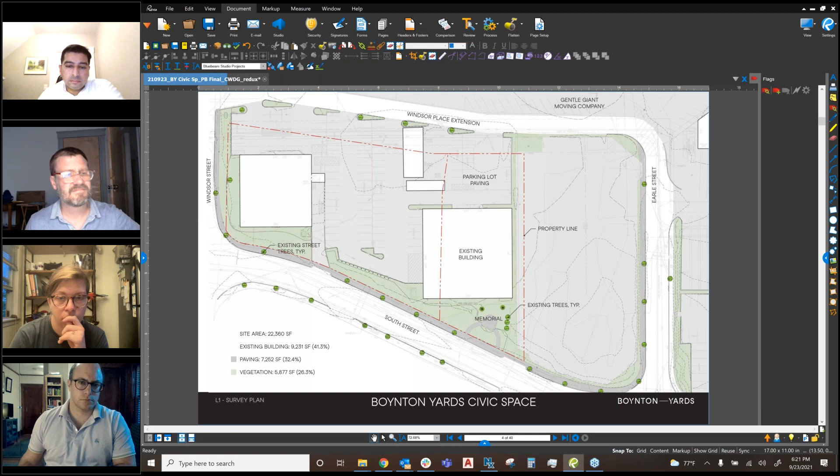We're focused on creating a civic destination with music, food, art, accessible to everyone, with vibrant shared seats, streets, and various public amenities and activations.

We invested in Somerville because of its distinctive, independent culture and visionary urban development plan. And the approved plan will eventually produce 2,000 new jobs, over an acre of civic space, over 12,000 square feet of POPs, $10 million in annual taxes, $23 million in community benefits, and $55 million in infrastructure.

This is truly a public-private partnership, and I think we're hoping to continue with this vision through the second application, the site plan review and approval of the civic space before us and the new building. So with that, I'd like to hand this over to Rolla Indris, the project manager, and have her introduce our consultants.

Thank you, John. Thank you all for being here tonight. It was not long ago that we were in front of you talking about our master plan special permit, and we've gone a long way since then, collaborating with the community and the city to get here tonight. We're super excited to present both projects. I think we've received great feedback along the way and incorporated many of the neighborhood's comments as well. And just to the earlier point on whether it's one presentation or two, we actually have 2 separate presentations. So we'll see civic space first, and then we'll go to building 2.

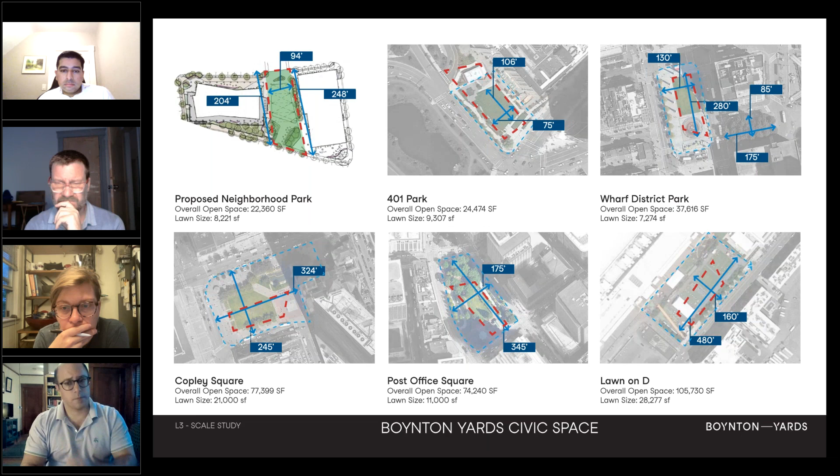So things like dog park and fitness and informal play, seeing a need for having more plaza and flexible spaces for seasonal uses and different community events. The idea of having performance space, a flexible lawn, not a lot of water play in the neighborhood, and maybe some idea of water features.

We also, in talking with PSUF, understood that it's an area that really lacks a lot of vegetation, and whatever we could do to green it up and add more shade for the comfort of the park users was a really good thing to get into the planning of the space. And then lastly, I think as Louisa touched on, the idea of creating an 18-hour activated space that really is intended to serve as a community space as opposed to something that serves the adjacent tenants.

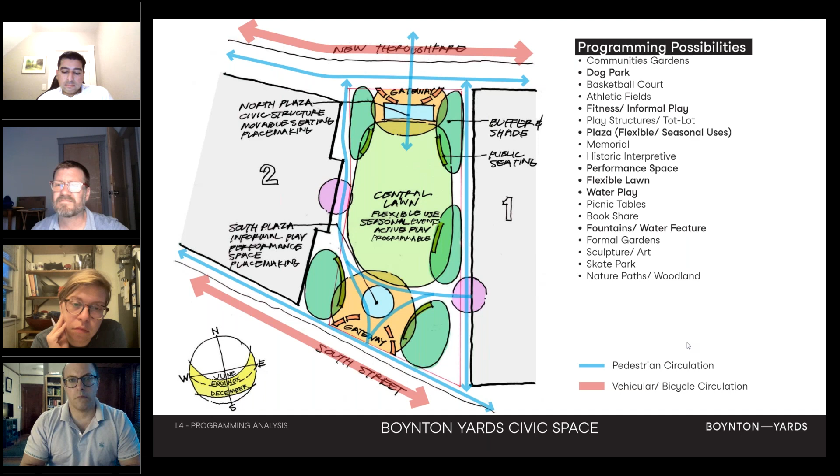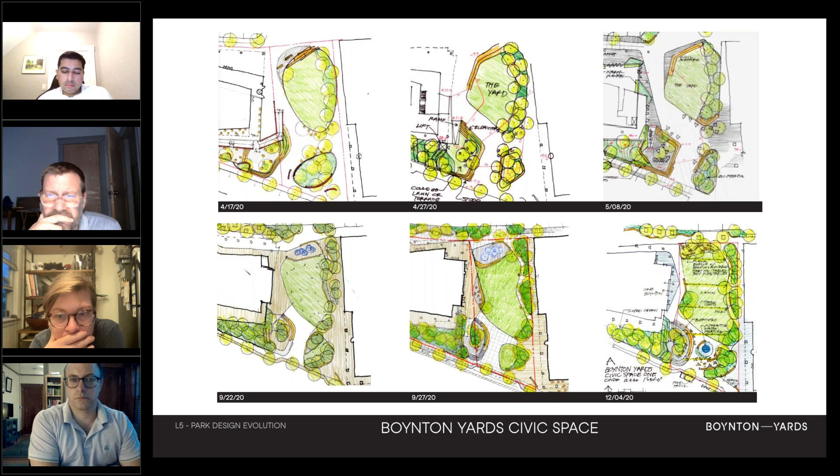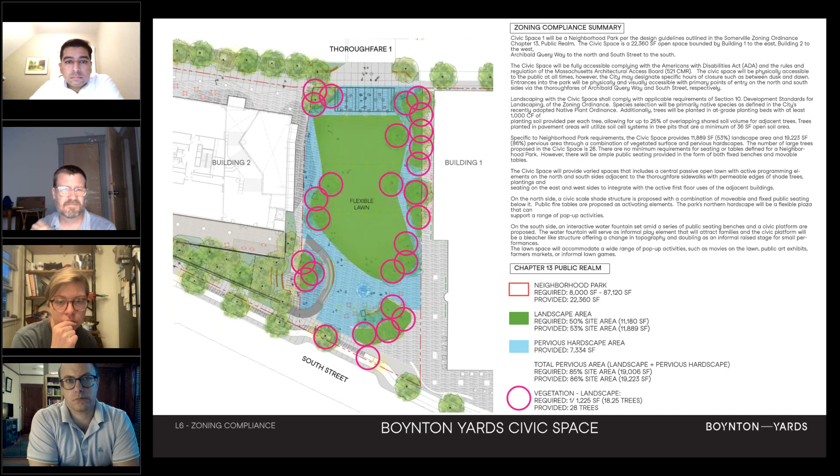Now into the actual plan and the form it took through our process. On the northern side, adjacent to Thoroughfare 1, which will be a flush shared street feeling more pedestrian than vehicular, is what we've called the flexible plaza. That's a hardscape area that will spill into the thoroughfare, so if that street were shut down for festivals, the activity happening there would spill into the open space.

Adjacent to that, at the top of the site, is a civic-scaled shade structure, a large arbor element providing shade. Below it would be public activators like fire pits, movable seating, and fixed seating, giving a wide range of options for users and spaces where people can socialize at the top of the space.

At the bottom, adjacent to South Street, is an interactive water feature, a flush water feature with color-changing lights creating different effects, a dynamic and fun element that attracts families. Surrounding that would be a series of fixed bench seating and plantings, making it a green, vegetated space.

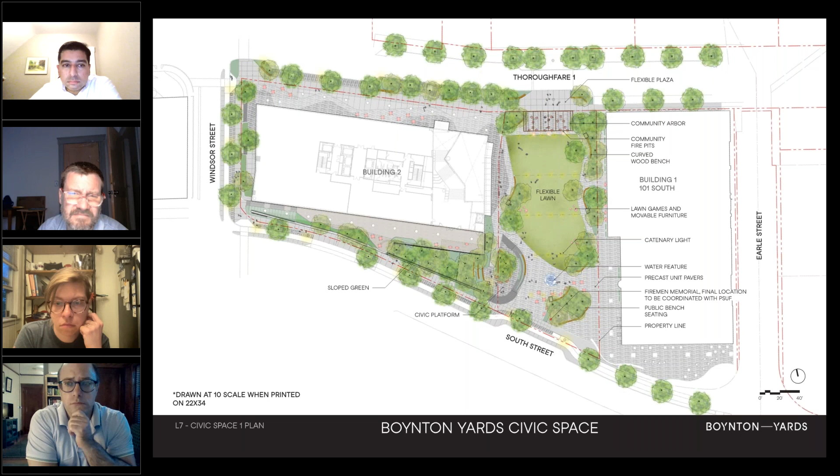In terms of the topography of the site, it's completely barrier-free and ADA accessible. It's a very flat site. The elevation is primarily all at elevation 10. The only grade change we really have is the one we're creating with the civic platform. On the lower left-hand side of the civic space, you can see that we're getting up about 2.5 feet to elevation 12.5. There's an accessible ramp that provides ADA access. And then that grade change is stepped down into a series of bleacher elements that allow people to sit at different levels and interact with the open space.

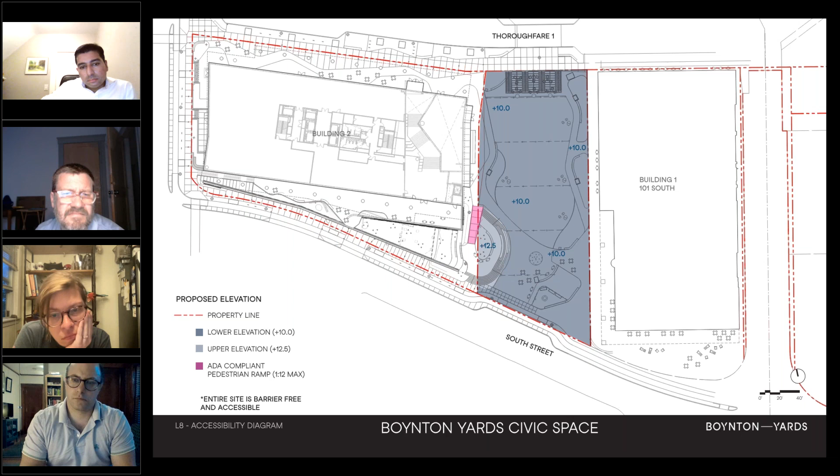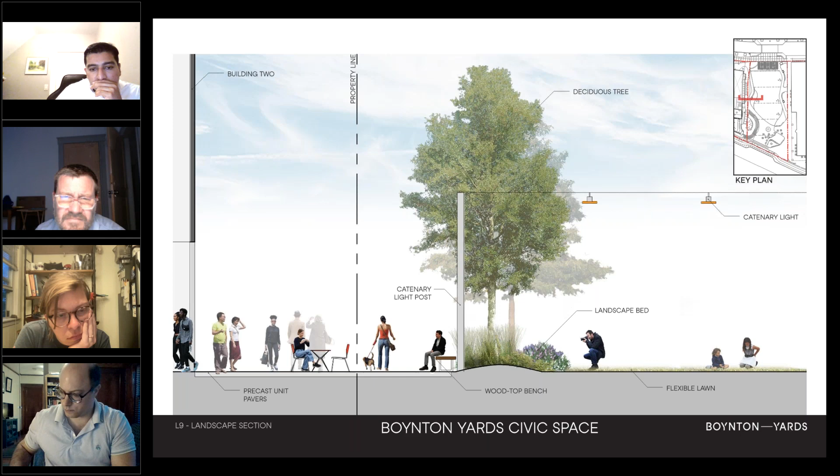The next series really gets into the edge conditions around the open space. This section cut is taken on the eastern face of Building 2. We have a widened hardscape that interacts with the first floor use of the building. You can see our property line and then a little more hardscape. And then there's a gentle roll to the topography with vegetation, which is the transition into that more pastoral green space.

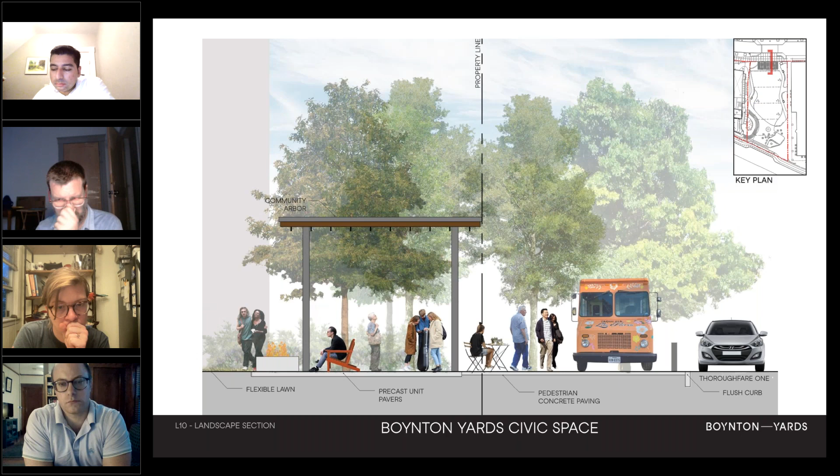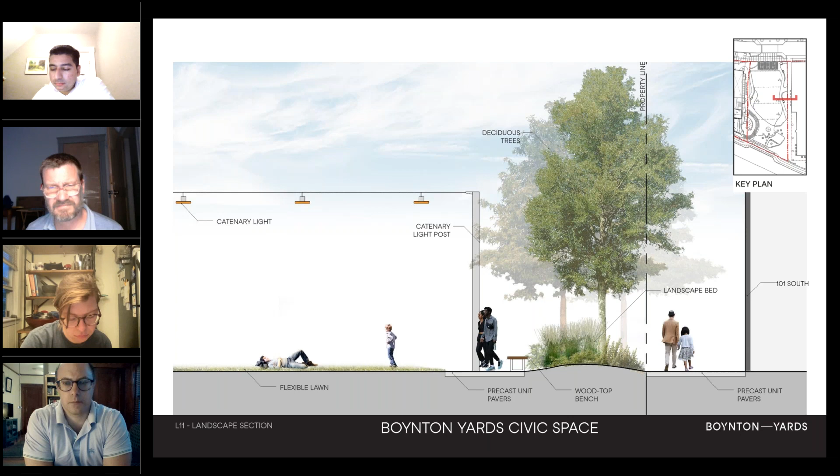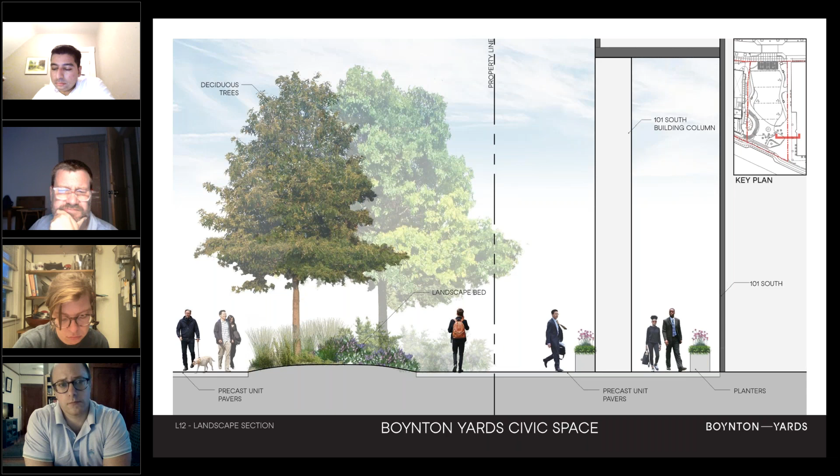As we move further south along the 101 South building, there's the lobby, which is basically an arcade. The face of the building at the first level is pulled back, so that hardscape is recessed. That's where we have some of our adjacent hardscape that serves not only the 101 South building, but starts to bleed into what would be the southern entry, the gateway into the civic space. With a bit of topography and the indication of trees, we're trying to not only provide shade but also buffer the building so that the park feels of a comfortable scale.

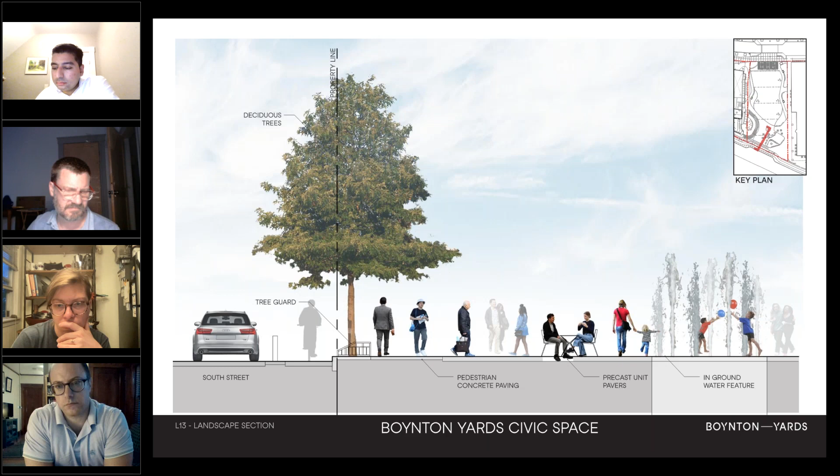That platform also has the ability to serve as a small performance stage because it's elevated. It's a space where you can imagine small events taking place. To the backside of that, we start to introduce more steps and more vegetation, which climbs up over the bike room of building 2. It's an intensive green roof, and that landscape rolls right up into the second floor elevation of the terrace. So it's a publicly accessible open space that really ties the building and the landscape together.

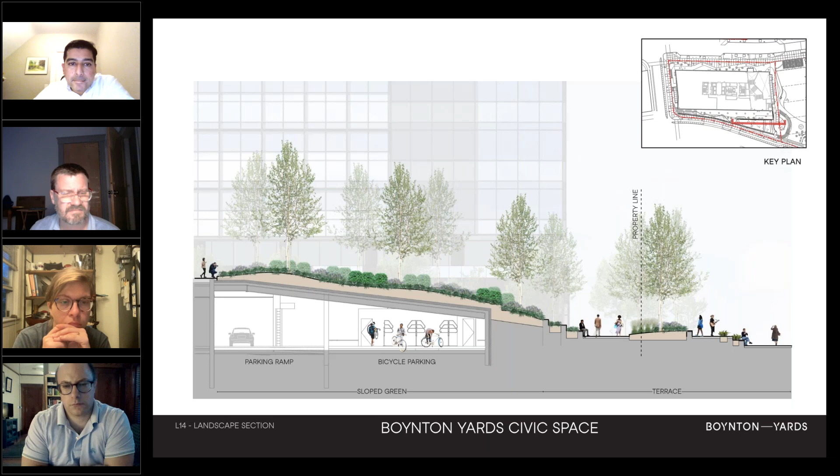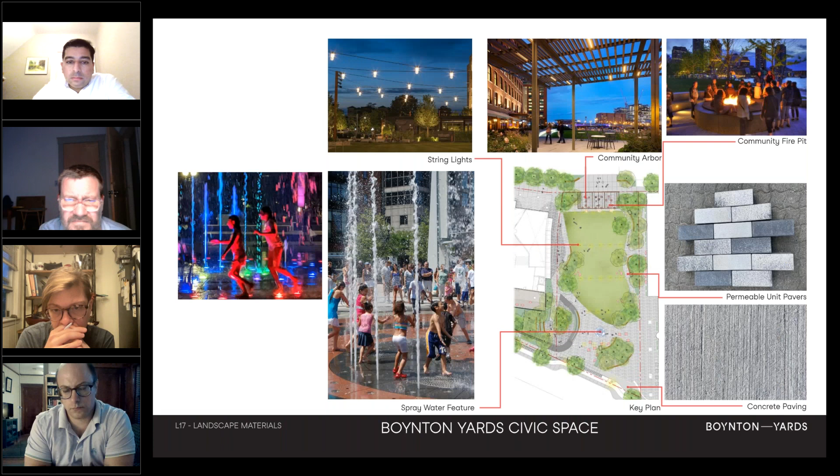In terms of the materials, this gives some character sketches of what the water feature could look like in terms of the color changing and the types of water displays, the image of the suspended lights above the open space, and then the hardscapes on the right-hand side, a combination of permeable pavers and concrete for accessibility, and then in the upper right, the idea of this community fire pit.

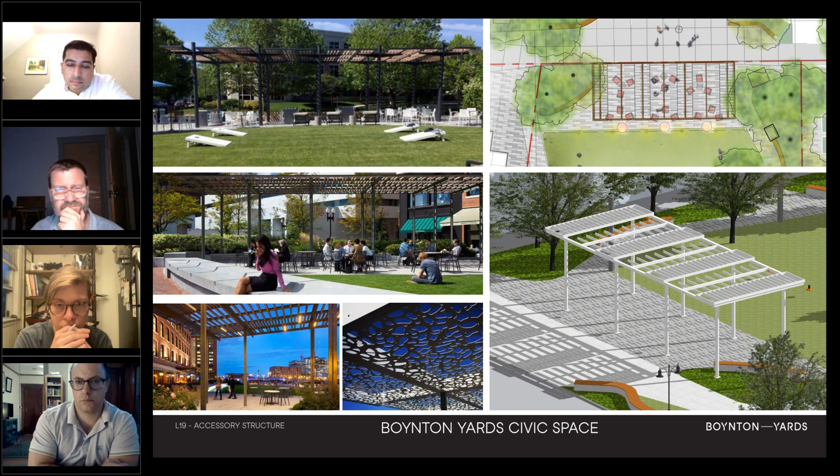Next slide. And then the site furnishings, again, really want to have a combination of fixed and movable seating of different sizes, characters, colors. So it's a really vibrant and dynamic public space where people can move the seating around as they see fit to dial in their own preference. And then the idea of the shade structure.

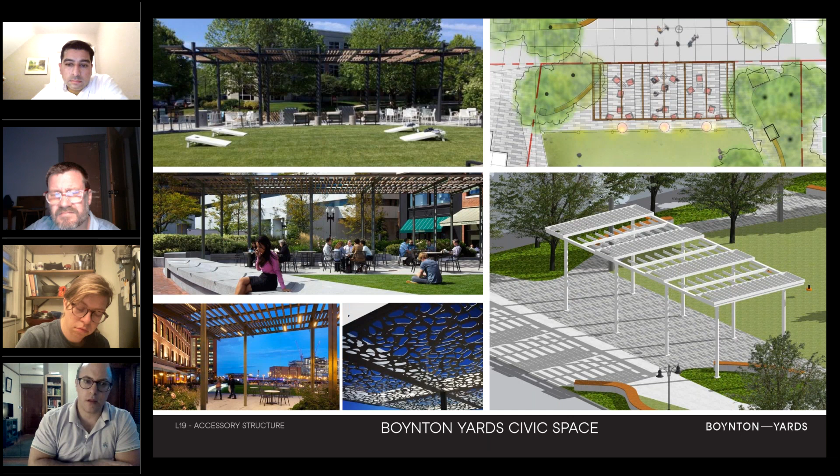So these are some precedent images of projects that we've worked on before. On the right-hand side, you can see the plan view and then a 3D model that we've developed to study how the lath work on the top or the roof of it can be designed so that it casts very interesting patterns throughout the day on the hardscape and provides different degrees of shade depending on the angle of the sun. Next slide.

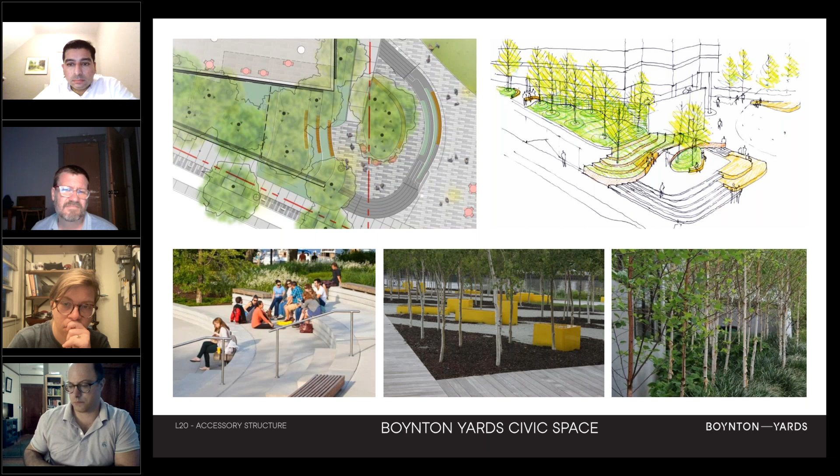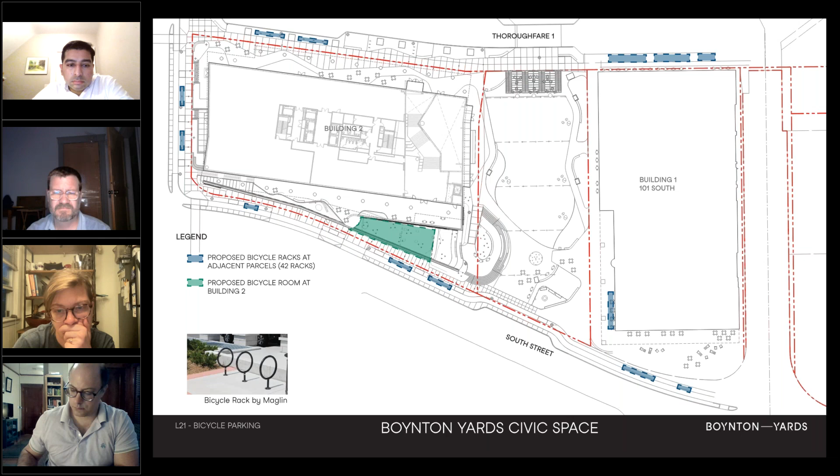Bike parking. So going through the process, we're really trying to maximize the amount of open space in the park, and both of the adjacent buildings, which are very integrated in terms of access, have a lot of requirements for bike parking. So the current proposal is that all of that short-term or bike rack parking that's out at the sidewalk is actually on the adjacent parcels, but there's a lot of it. The other thing to note is that on the Building 2 parcel, we have a large bike room that Victor will talk about that's located below the slope green. So there's a lot of activation and a lot of facility there for bikes immediately adjacent to the civic space.

And then, of course, the fun stuff - the vegetation. The existing condition didn't have a lot of that. It was not biodiverse. There wasn't a lot of it. So we've been working with the native plant ordinance that the city has put out. We've been talking with PSUF about different species, and we've been talking to other consultants internally about how to get species that are of maximum wildlife value so that it's a healthy ecosystem. So the idea here is that we have all native plants, plants that are able to support a lot of habitat, a lot of pollinators, but also be colorful and beautiful compositions unto themselves, so that it's a very pleasing thing to be in terms of that open space.

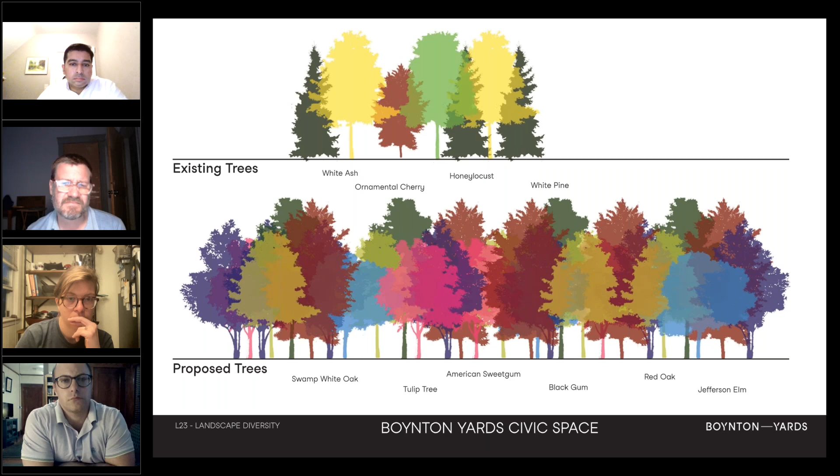Just to underscore the benefits of the landscape design, obviously we're trying to have native plants, but we're going beyond that and really trying to have species that are supportive of local bees and insects, supporting habitat and pollinators, so we can start to bring back some of those ecological services to the neighborhood.

The last thing to touch on is this idea of the temporary park. All this stuff is great and will be built in the future, but we really want to get into the ground now. As part of the 101 South project, the interim park has been constructed—basically a lawn space with some seating—and it's something we're using as a testing ground, so we can survey users and get more information about what people would like to see in the final design of the park space, in terms of programming and activation and other features.

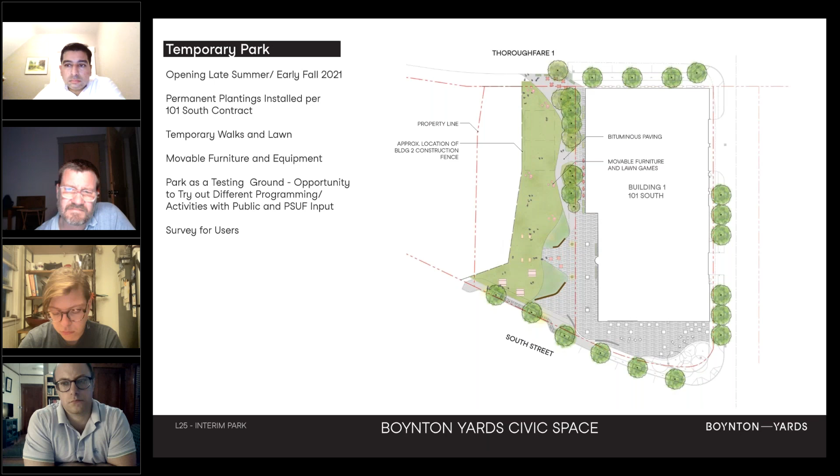The developers are doing a lot of activation lately, through the whole course of summer pretty much. The Once Somerville Music Festival has been having venues out on the site or adjacent to it, which has been really successful in starting to get people excited about coming to the site. There's a ton more of upcoming events.

I mentioned the idea of a survey—for a lot of our public park projects, we employ a SurveyMonkey app, an app-based questionnaire where you can survey what people using the space would like to see. Then you get all that data, sort through it, and really come to a good idea of what a consensus-based approach might be to some of the uses for the open space.

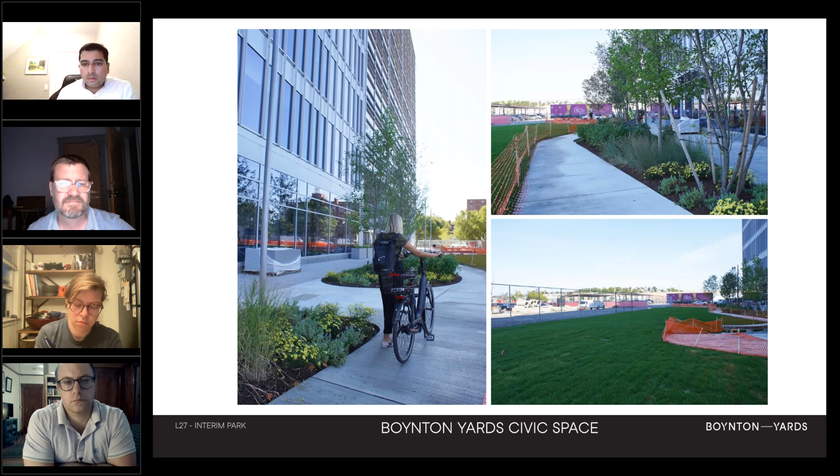Here's just a couple shots of what the current condition is. On the eastern side of the civic space, the 101 South building has actually begun to install a lot of the permanent vegetation that will be part of the finished park design. That'll already be in place and start to reach a mature condition by the time the rest of the park is built out.

The lawn is in place. It's still being established and watered in, but that'll be able to support various types of activities very soon.

I believe that's our last slide. Thank you.

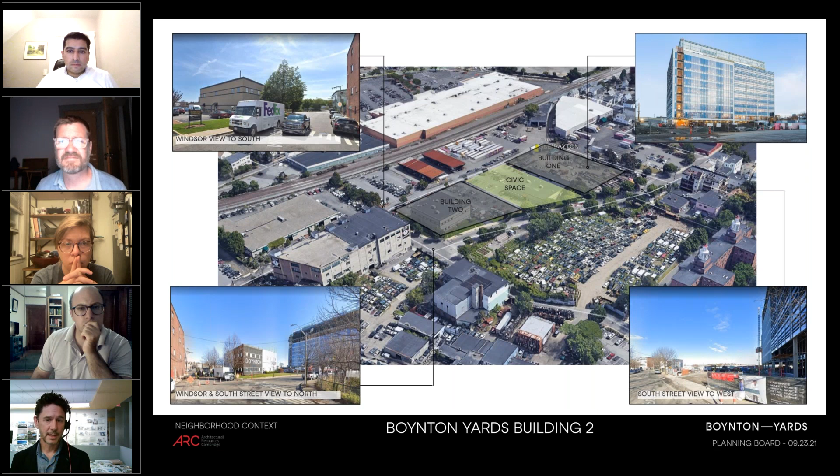So as we began, our process is predicated on finding the best possible solution. That involved a lot of sketching, thinking about ways in which to connect people from all four corners of the site, and how can we begin to draw people to the site.

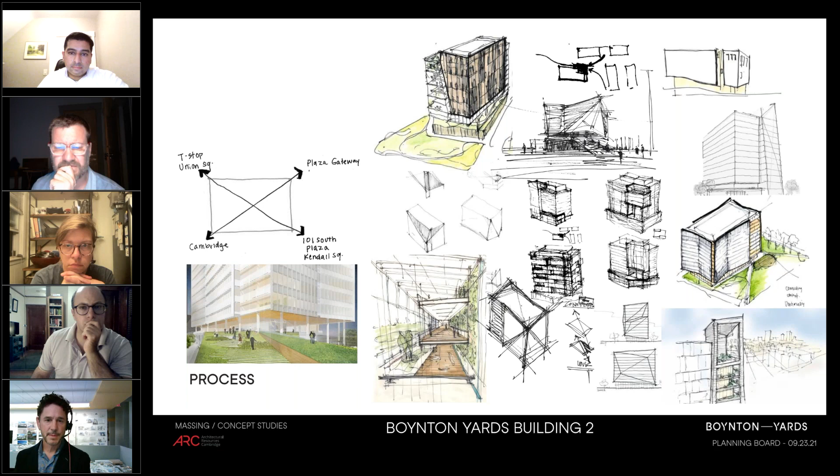Ideas of greening the building, landscape, ecology and sustainability were primary in everything that we did, and fundamentally, as a means of establishing connections to the landscape and making the place feel very much like the public realm that people wanted to be in - this is a home for people.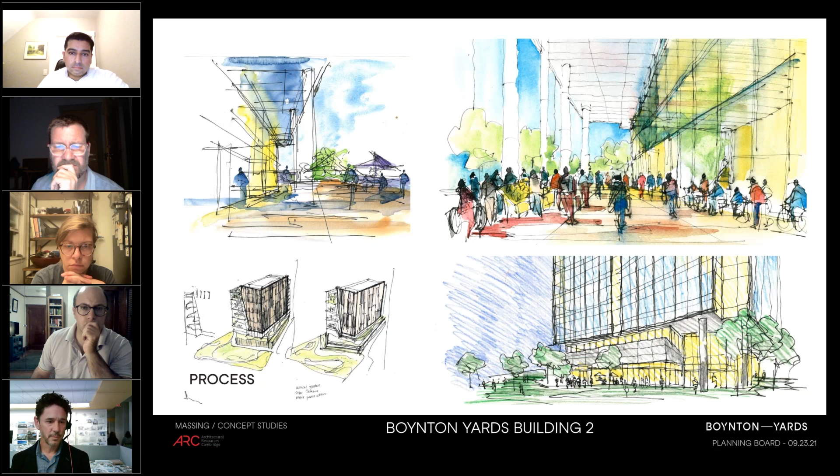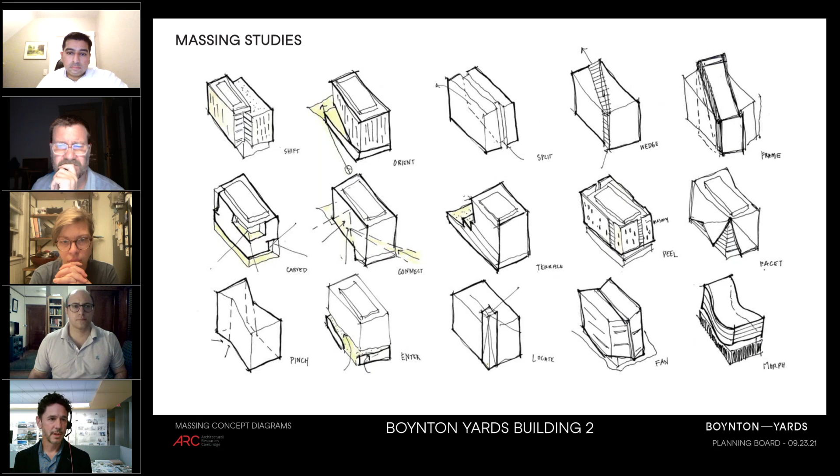In terms of the massing, we began looking at a variety of massing options, thinking about how we organize the building around the site, how do we draw people through the building, and how people begin to kind of perambulate around the building as priorities.

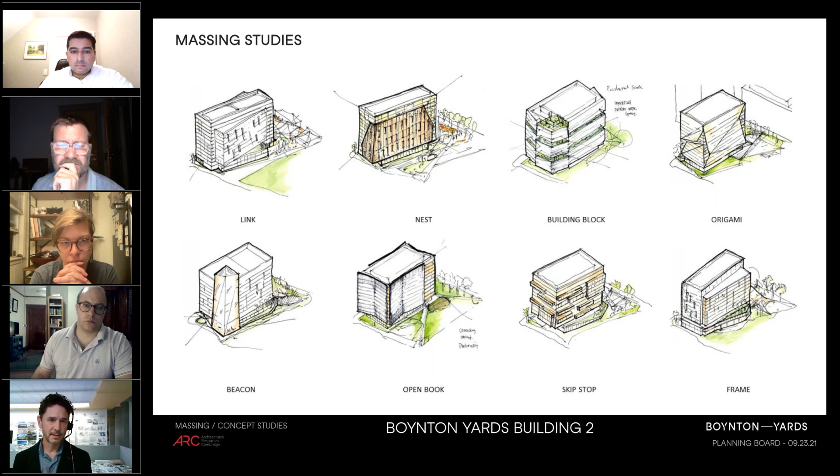As we move forward, we began to distill some of these massing studies into clear ideas that are linked in notions of art and science and placemaking. And that idea of placemaking is fundamental in everything that we were thinking about.

As we move forward, the larger ideas began to distill into three clear ideas that we defined as: link, which is about making connections; this idea of origami, thinking about folded paper and marrying science and art; and the third option became a hybrid of the two, thinking about this idea of an open book, ideas of text and reading, and connections to public space and how people spend their time there.

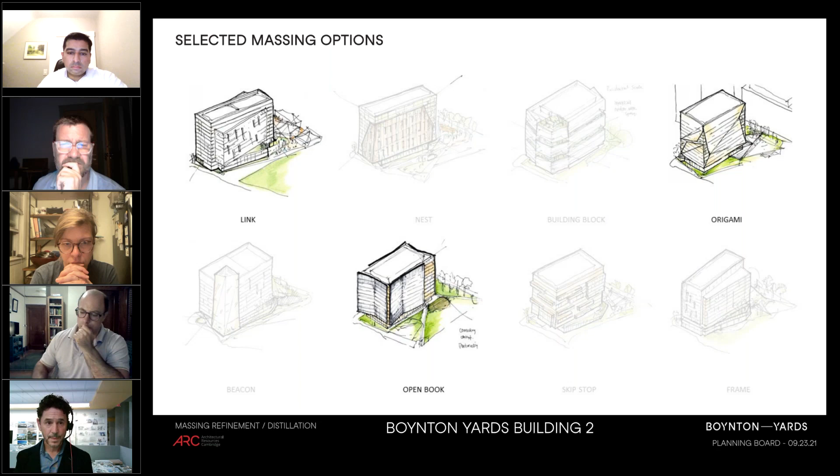As a part of the Somerville zoning ordinance, we were required to bring three different and distinct options to the UDC for review. So we developed each one individually.

The link, kind of traversing diagonally from northwest to southeast. Origami, thinking about this folded surface - and with the origami was where this first idea of the landscape beginning to kind of fold up into the building became an idea. And then with open book, the articulation of the building and the idea of landscape being integrated with the building became an even more powerful notion that we began to develop.

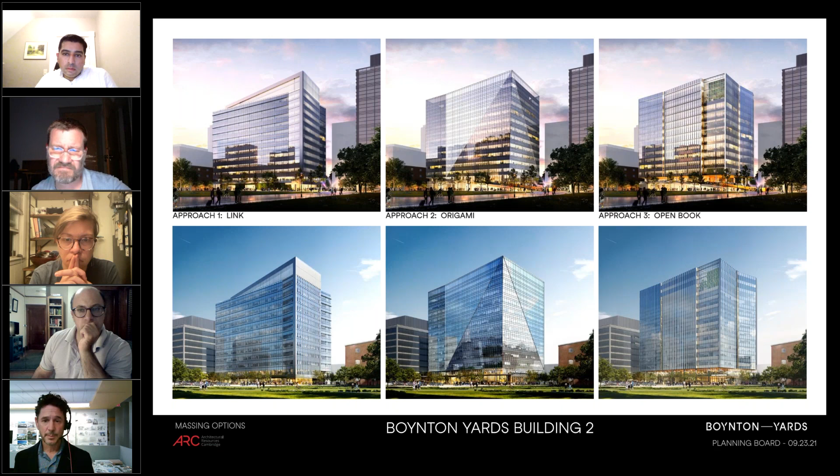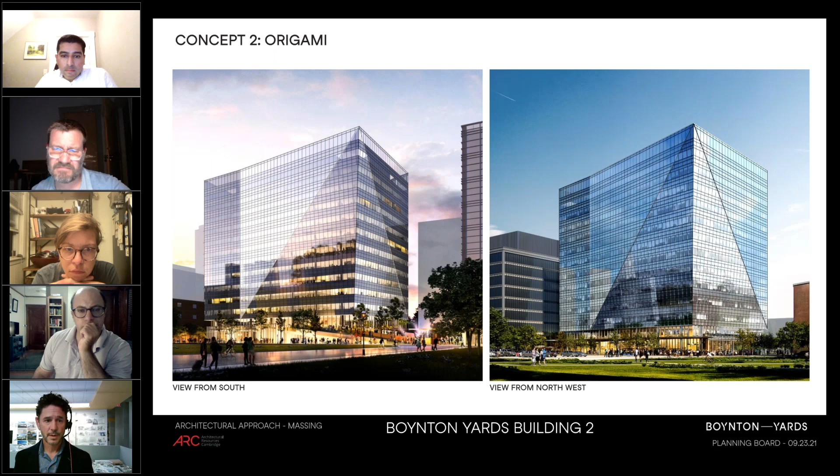And quickly, these are the larger views of the initial concepts: link, the origami study, and the open book - which, subsequent to reviewing with the Urban Design Commission, they agreed that our preferred scheme of the open book was the way to proceed.

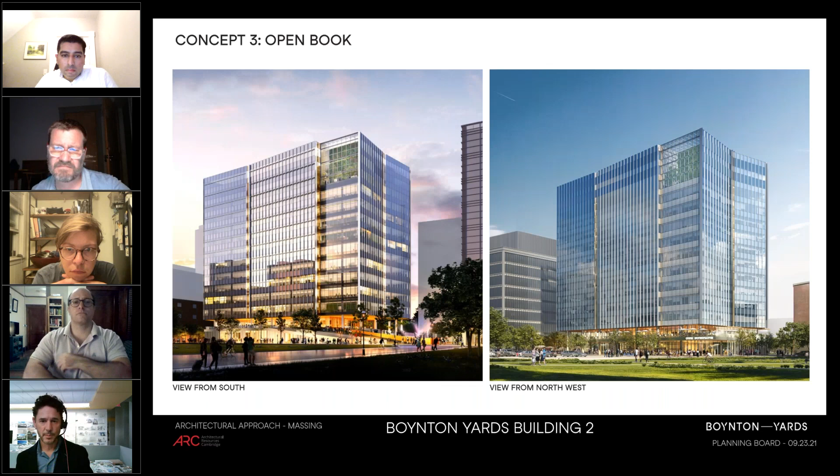The open book also offered us a little bit more flexibility in terms of massing development, thinking about the Somerville zoning guidelines for the requirement of a two-story podium and a clear division of a base, a middle, and a top. It also allowed us to refine the massing and scale, carve away the corners, and make a building that was more human scaled with different readings depending on where you looked at it from different areas in the site.

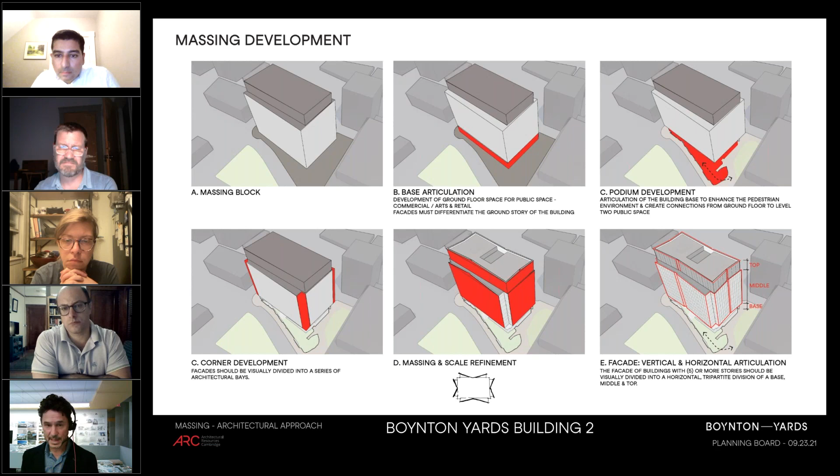Very quickly, these are the massing diagrams submitted to planning and zoning. Zoning compliance diagrams, which I don't need to spend time on, but they articulate the two-story podium and the tripartite organization of the building and conformance to the Somerville zoning guidelines.

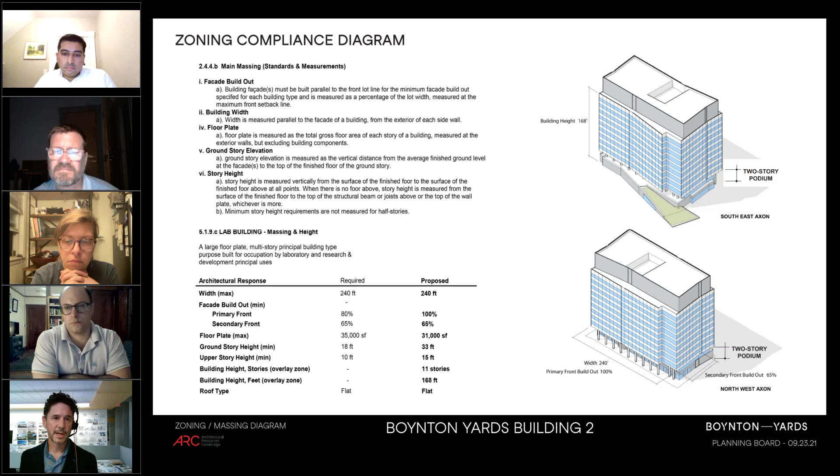This image further articulates conformance to Somerville zoning guidelines, both in terms of the development of the facade, the piers or pilasters, the visual light transmittance of the glass and the visual connections through it, and then a clearly differentiated lobby and storefront facade system to create human scale development around the building.

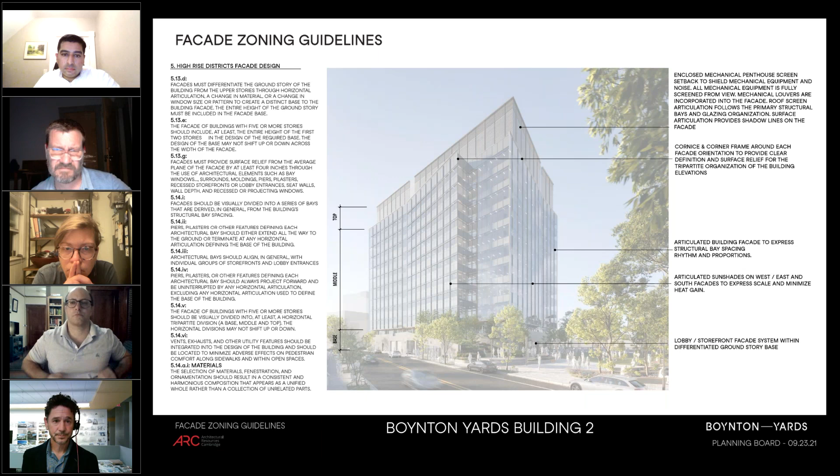Conceptually, this idea of placemaking was very important to the development of the plan. We're working at a range of scales and textures, really thinking about how we begin to attract people to the building and through the site.

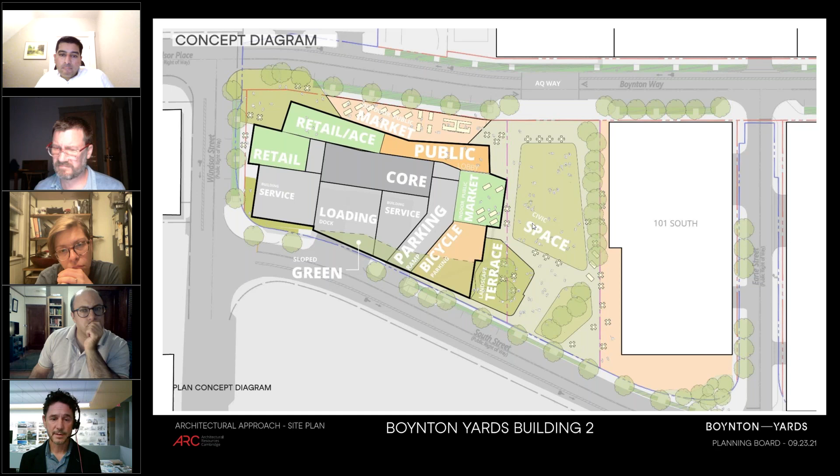As Ian noted, Thoroughfare 1 and the connection to the north side of our building has the potential to become a very expansive and generous public space. To that end, the north side of our building at the main entry is envisioned as potentially an outdoor public market, connecting from the west side of our building to the civic space—a powerful idea, in addition to the bicycle parking underneath the sloped green roof that Ian showed you previously.

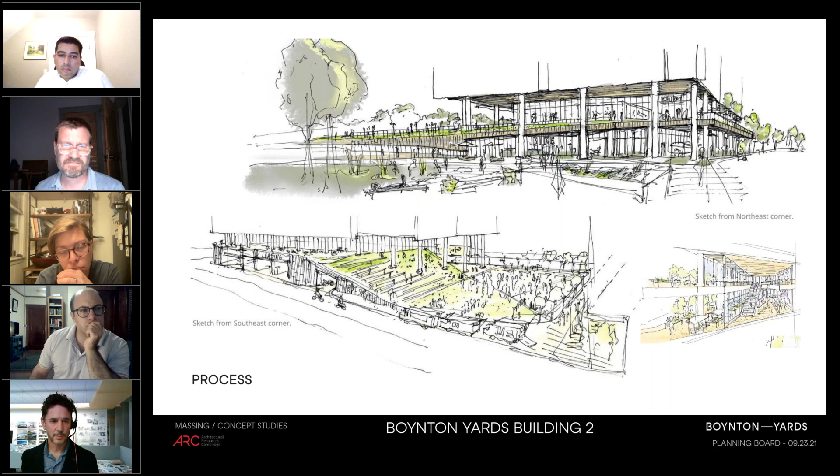Here's a little bit more of the process, really thinking earnestly about how you begin to fold the landscape up and draw people into the upper levels of the building, working to create a sense of place not just at the ground level, but also at level 2, so that the public can really begin to permeate the development.

As the project developed, this is a cutaway isometric—facing us is north against Thoroughfare 1, where the main lobby is. You can see in yellow the articulation of the public lobby, a set of civic stairs that go to an arts and creative space, and a connection near South Street to an upper level terrace that then connects to the sloped green roof above the bike room and then to the civic space.

One of the really helpful pieces of feedback we got from the Urban Design Commission was to further this idea and add a public stair, which you can see to the right of the screen, that takes us back from the level 2 terrace down to Windsor Street, so people can really circulate around and have multiple access points to the building.

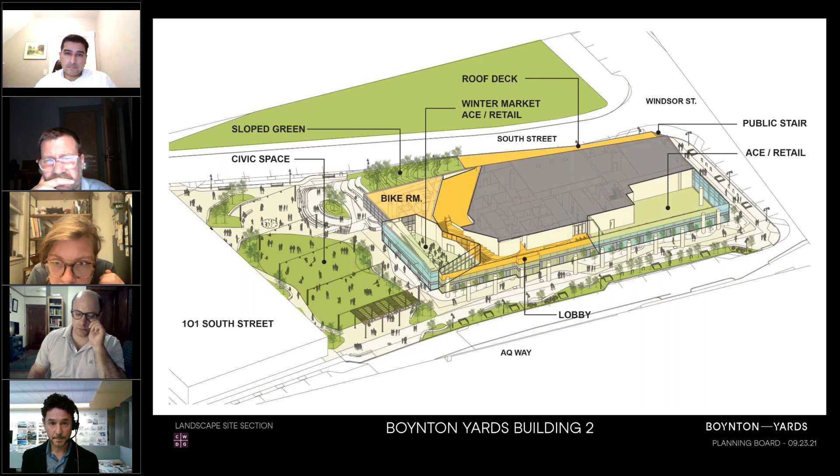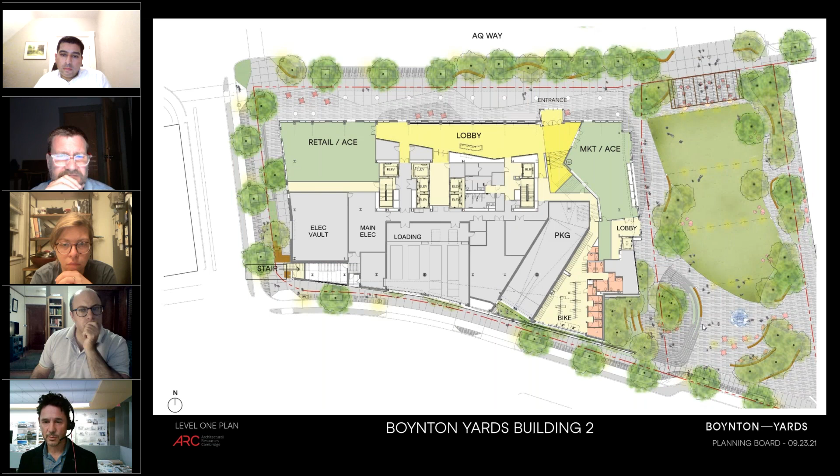In plan, this is just a plan view. You can see the lobby to the north, the building entrance, what we're calling the winter market in green adjacent to the civic space, some retail space to the northwest, a bike room for 102 bikes, and then the sloped green roof rising up over the bike room that connects the civic space to the upper level of the building.

So this sloped green is above the bike room. This yellow space is the civic stair that connects to the level 1 lobby. There's the arts and creative space, which potentially could be an art gallery, some spill-out space, and then people can begin to occupy this terrace and make their way back down to Windsor Street on the public stair.

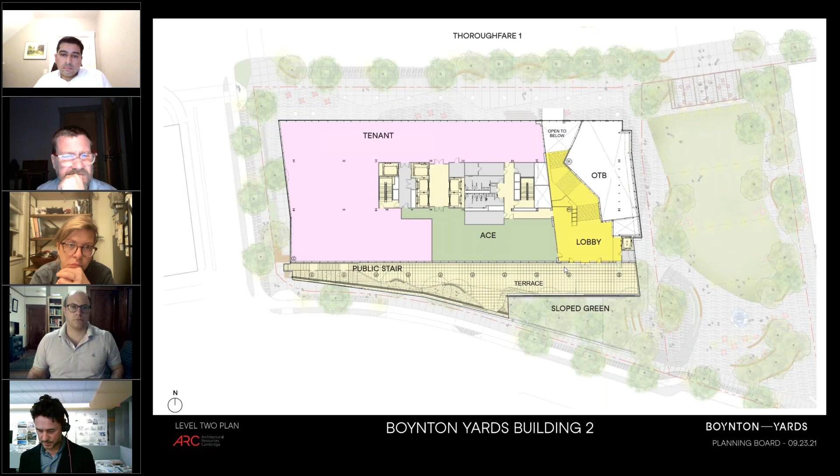And then I'll turn it over to Ian for some quick discussion of the landscape.

Thank you, Victor. Yeah, so as Victor touched on, really that north side of the building has a really expanded public realm. We think that a lot of the foot traffic and bicycle traffic will be coming from the left-hand side, from the Union Square side of things, and so the idea there is that there's a receiving entry plaza right at that upper left-hand corner.

And then as the building is pulled back with an arcade, having a really dynamic hardscape there with an interesting paving pattern that creates subspaces, that plays with the architecture, but also draws your eye along the facade to the green space beyond, to the civic space, to make a really welcoming public realm.

And then adjacent to Thoroughfare 1, you can see there's a really robust palette of street trees and site furnishings for a very shaded and comfortable experience there.

And then wrapping around to the south side, the sloped green is something we've talked about, and the idea of that landscape starting at the lower level of the civic space and climbing up the slope above the bike space, then reappearing again at the second floor roof terrace, and continuing on and stepping down again on the west side of the building, where it meets the public realm at grade at the intersection of Windsor and South. So really a composition of landscape integrating and carrying through the building for a unified composition.

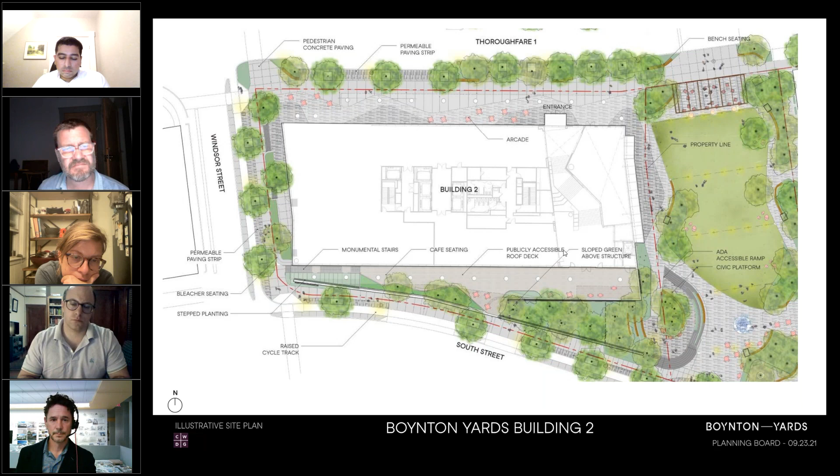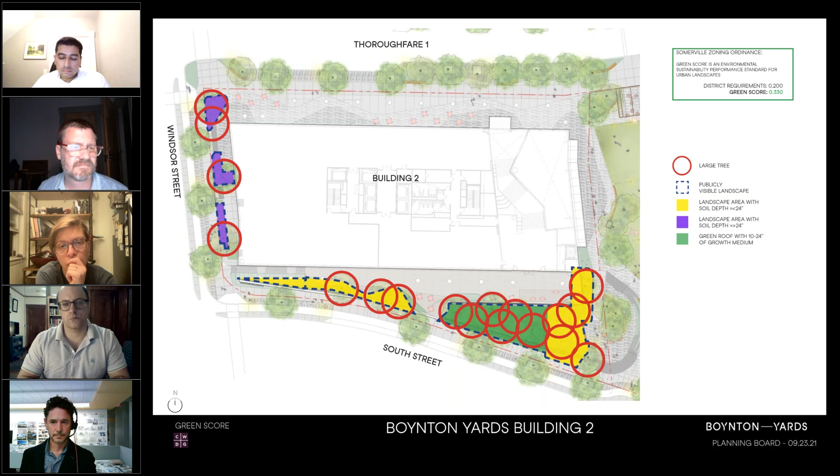So for the building, we obviously have to do a green score, and a lot of our credit comes from the sloped green, which is an intensive green roof, but also the vegetation on the west side along Windsor. For this district we need a 0.2 rating. With this landscape design, we are at 0.33, so we exceed those requirements for green score.

And then again, we saw this previously, but I think what this shows is not only the sloped green side and its integration with the civic space, but the reappearing landscape on the second floor level with trees and plantings, which then picks up and steps down to the street level on the left side.

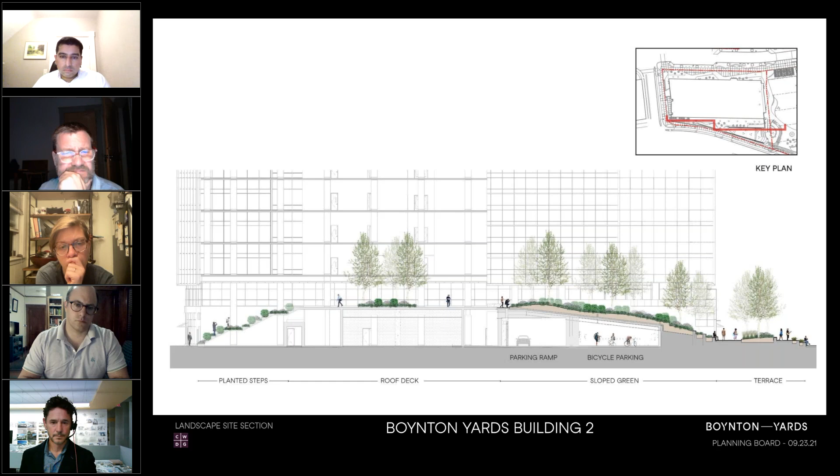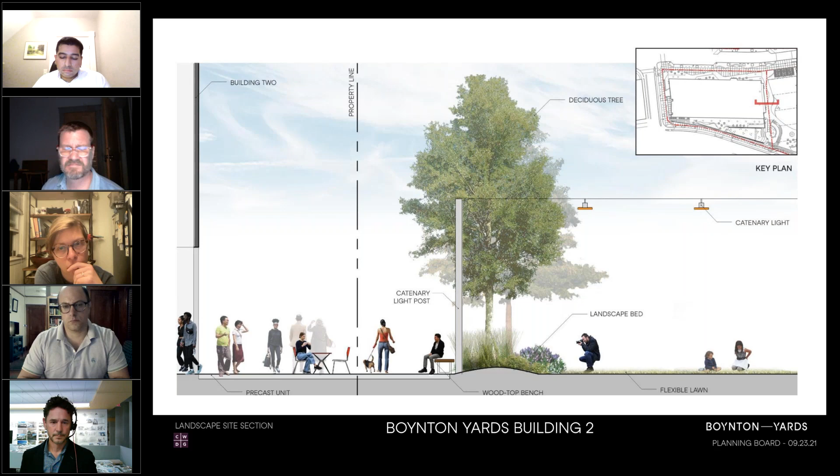And then similarly, just walking around the site, we saw this condition previously, but this is the edge at the civic space where we have that slight buffer between the hardscape of building 2 and the civic space.

And then the section on the west side along Windsor, again working with mobility, we have 2-way bike lanes. The bike lane closest to building 2 is actually a raised cycle track condition with a buffer, a 6-foot wide furnishing zone, and a 6-foot wide pedestrian zone. And then because of resiliency and flood issues, the finished floor is a little bit elevated, so there's some grade change there that we mitigate.

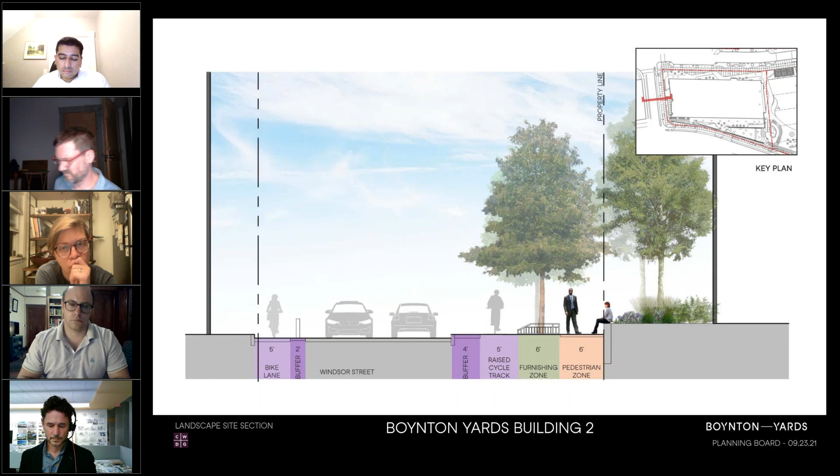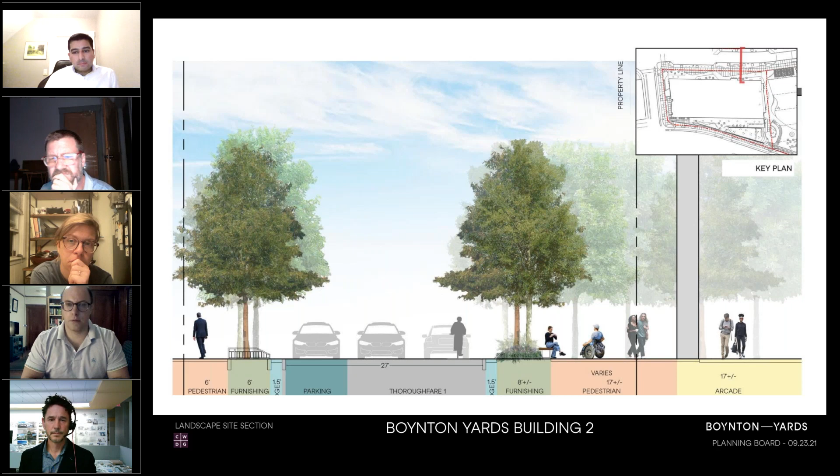And then the section through Thoroughfare 1, you can see the arcade on the right-hand side, and that broad shared drive condition where there's pedestrians, bikes, and cars - an 8-foot wide furnishing zone, a wide pedestrian zone around 17 feet, and an additional 17 feet comprising the arcade space, where you can imagine outdoor markets spilling out and really making that a wonderful public realm.

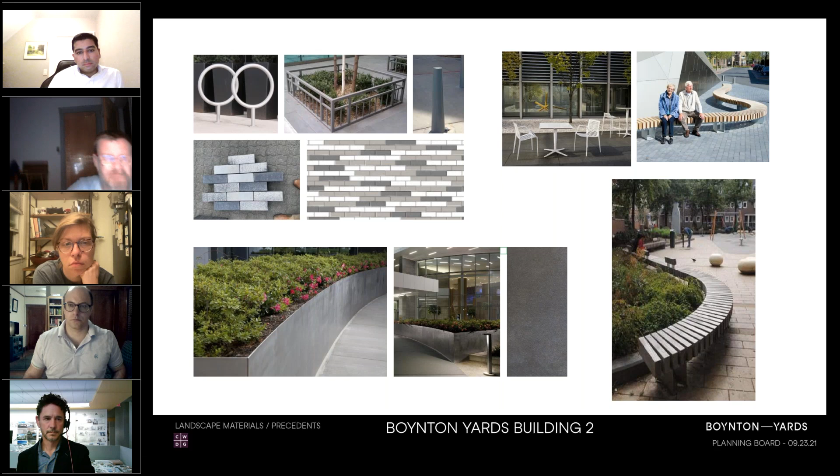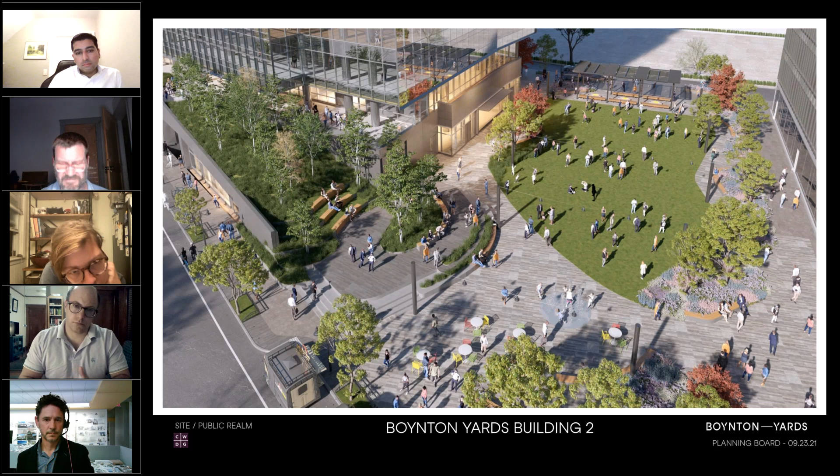Again, the aerial view looking more focused on the civic platform and the slope green and how those relate to each other. On the lower left, you can see the lights of the bike room, which is an activator itself.

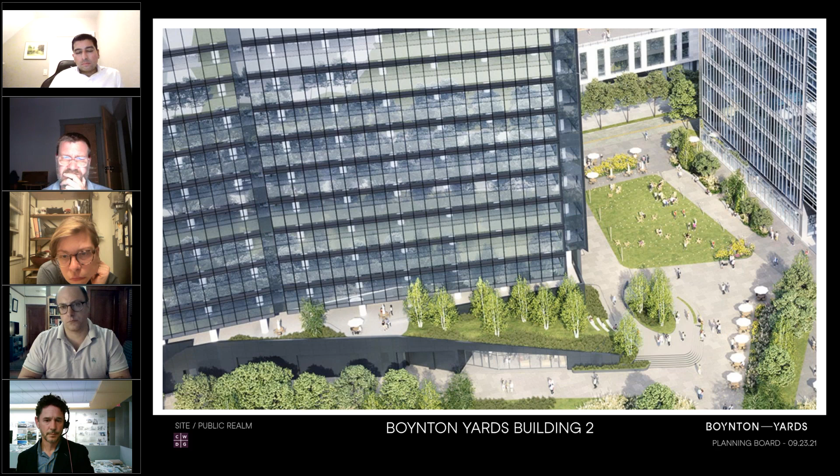And then spinning around and looking at that same view of how the trees march down above that bicycle room.

And again, just on the species, trying to really play up the biodiversity and cater to the local wildlife, providing habitat for migratory birds and nesting grounds for them. So a lot of those same concepts we're talking about in the civic space, we want to carry into the landscape around the building. It's a very integrated composition.

We've had a lot of dialogue about encouraging more diverse species into the site, not just little songbirds, with different strategies on the architecture. In particular, there's an opportunity with bats, because bats are a threatened species and very beneficial to the environment, particularly because they consume mosquitoes and other bad bugs.

Peregrine falcons are also endangered, and they do very well on buildings. So as part of our work with our habitat consultant, we're looking at finding a home for some peregrine falcons on the building, which will help control the rodent population. We're gonna have a building with peregrine falcons on the roof.

That's just awesome. Cool to me, it's exciting. We're pretty excited about it. With the live webcam. Yes. You better.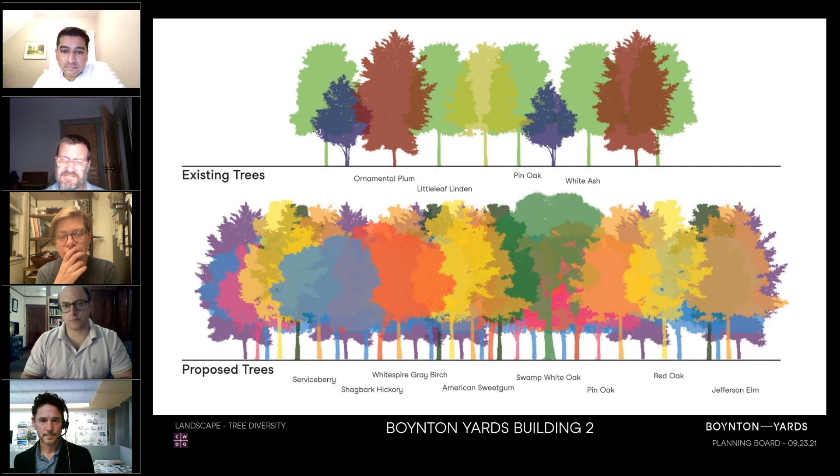The strategy also includes reuse of water and water storage, parking for electric vehicles, enhanced mechanical systems that will reduce natural gas usage by over 80%, triple glazing, and broad access to daylight and views with energy efficient lighting. I noted stormwater harvesting and the green roof. In addition, the project will purchase renewable energy credits and some carbon offsets.

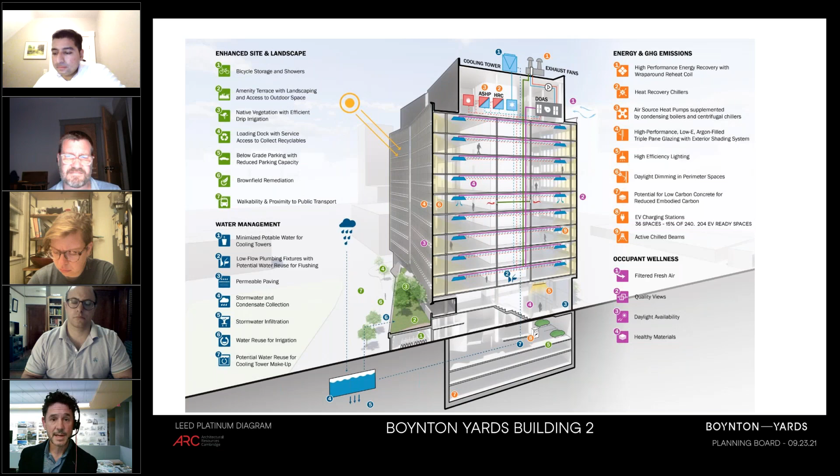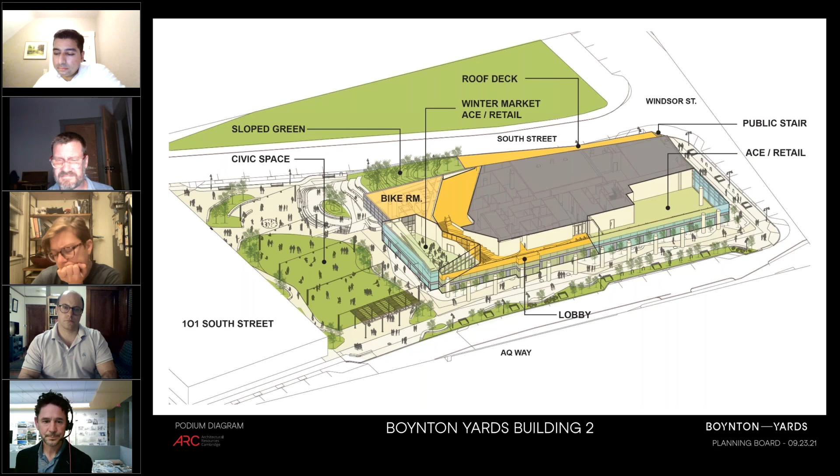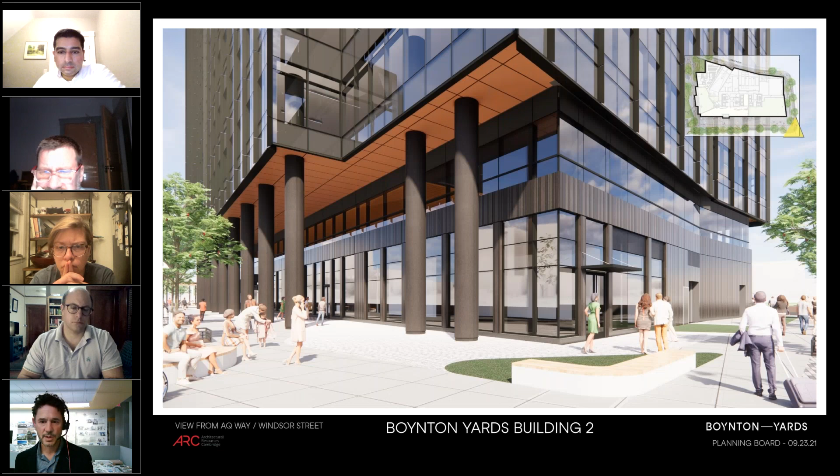These are some diagrams we submitted to the city articulating the 2-story podium base, the articulation of the building middle, and the articulation of the storefront and street front public realm in conformance with the Somerville zoning guidelines. This is a rendering along thoroughfare 1 and Windsor Street, which also responds to some feedback we received from the Urban Design Commission.

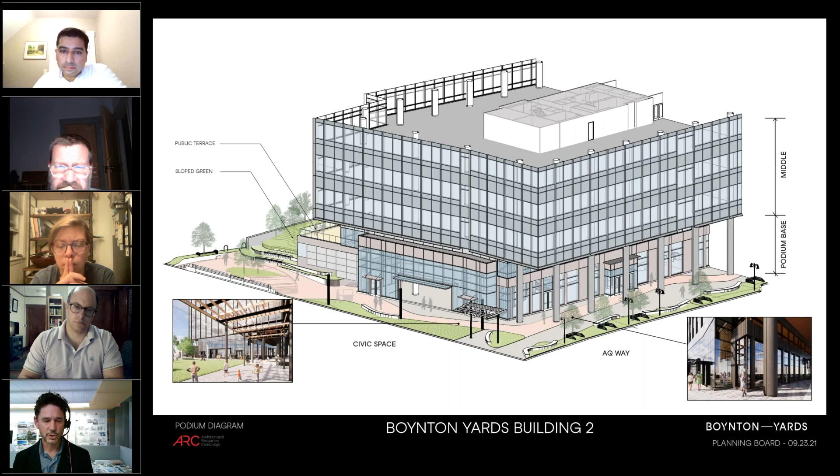As we move around the building, we're looking at a diagram of thoroughfare 1, the civic space, and here the building steps up to a 2-story volume. Another recommendation from the Urban Design Commission is what we call the winter market, a kind of public market space where people can spill in and out of the building depending on the use, with a more direct connection to the civic space.

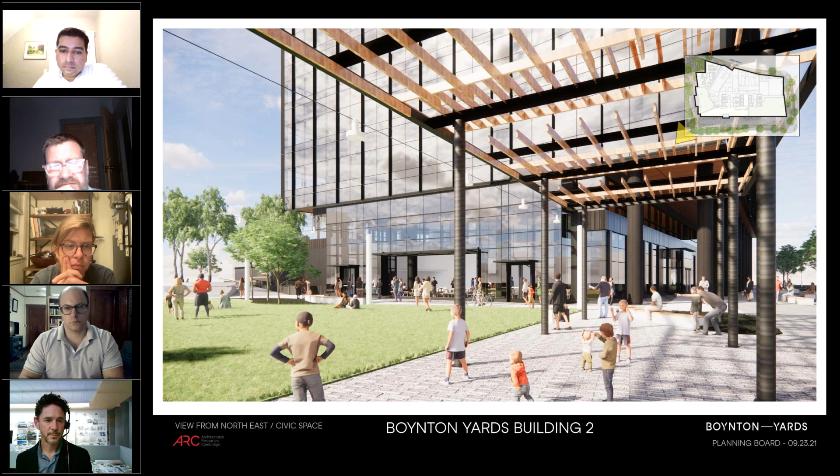Here is a view of it in that corner at thoroughfare 1 from the northeast, looking into the 2-story volume of the winter market. As we're spinning around underneath the arbor Ian described before, looking into the winter market, here is a professional rendering of what this space might look like - potentially a restaurant, or potentially multiple uses depending on how the program shakes out.

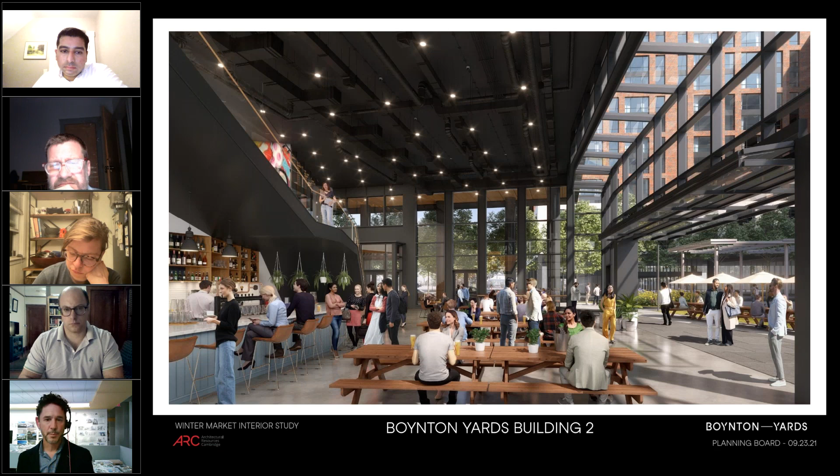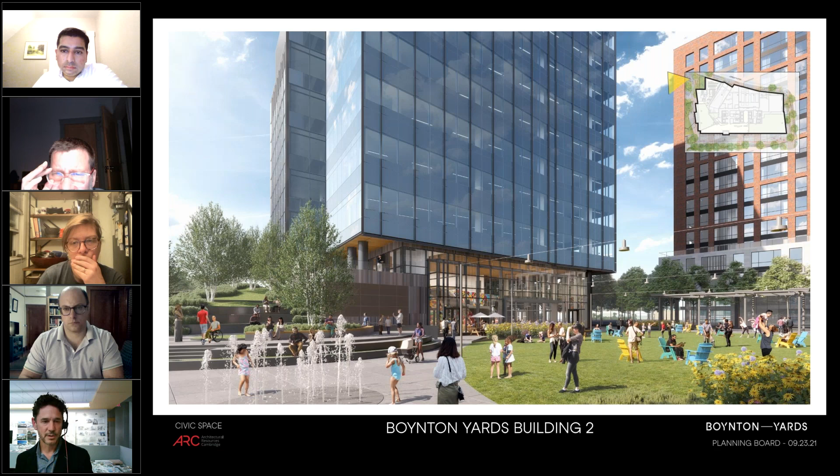Pulling back outside the building within the civic space, you see the water feature, the raised platform, the slope green to the left, and the visual connection to the winter market in the building. You can also see the raised level 2 public terrace on the building there.

Moving around and up, we now find ourselves on the upper level terrace outside the arts and creative space, or perhaps there's a cafe or bar up there. You can sit on benches overlooking the sloped green and look out onto South Street, and perhaps in the future an enhanced South Street Park.

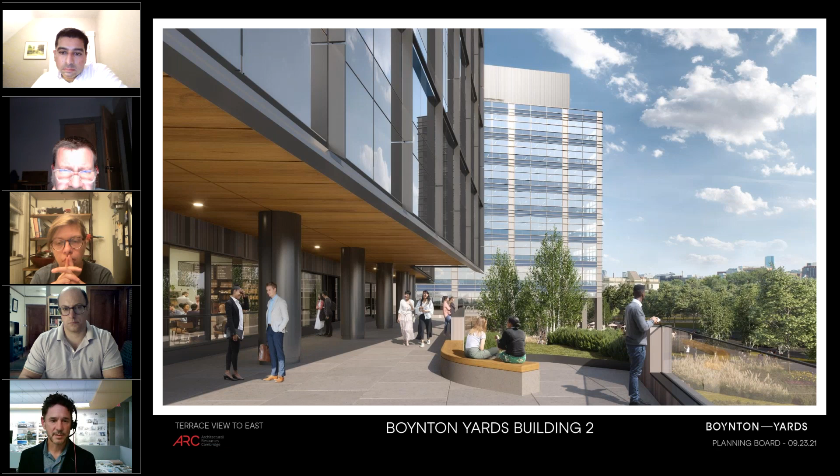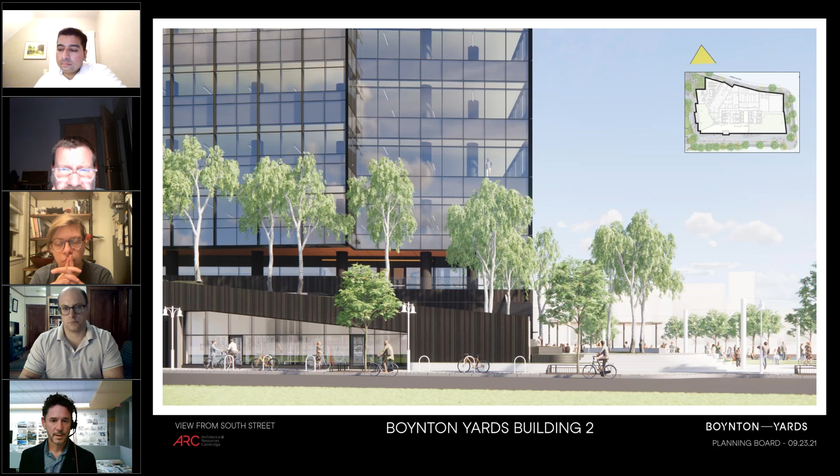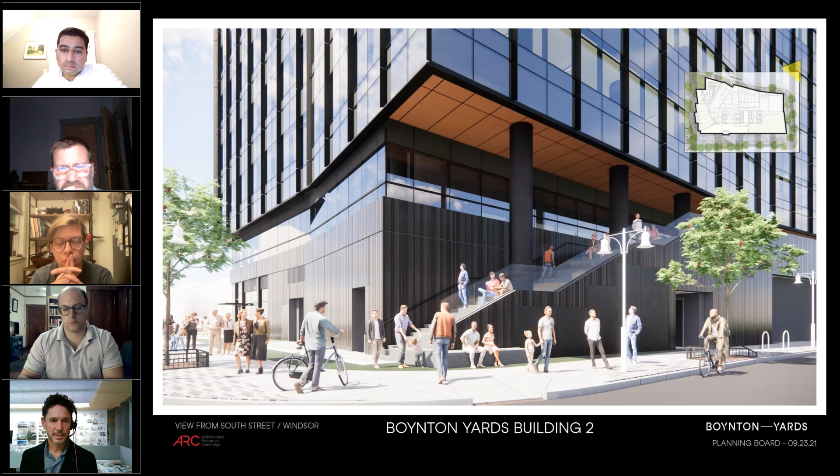And then swinging around to South Street, you can see the bike room sliding underneath the sloped green roof. Then moving around the building, a view of the bike room at nighttime, the corner of Windsor and South Street with the public stair, and then moving back around the building at Windsor and Thoroughfare 1, we get a broad view of the building.

The articulation of the 2-story podium base, the clear delineation of the building middle, and then the top. There have been many components which responded to feedback from the Urban Design Commission, in particular the articulation of the top of the middle and the building cornice, which was very helpful. And then lastly, an image at Windsor and South Street of the future building.

So it's been a very healthy, fun, productive discussion and design process. It's been a great collaboration with the city and the Urban Design Commission, and of course Leggat McCall as the developer. Overall, it's really been a rewarding design process for us, and something that's very meaningful in terms of how we approach the building. And we think this is going to be a very great contribution to Somerville, and we're very excited and proud of the building that we've all designed together. Thank you.

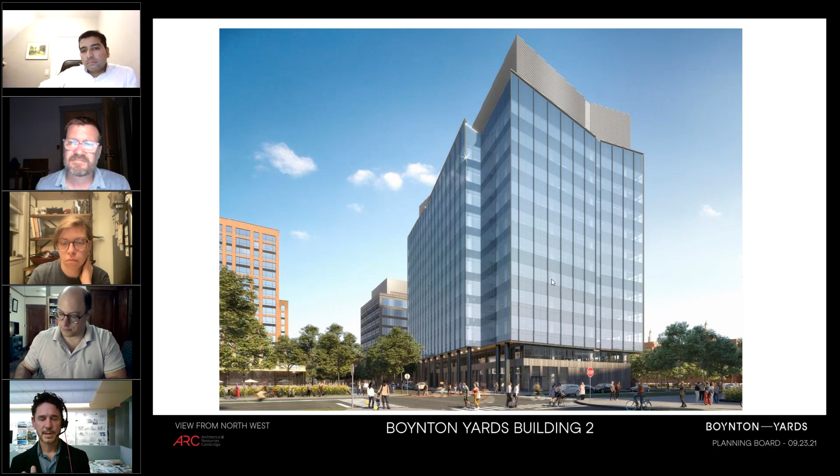The facade will begin to reflect the movement of light and shadow on it, particularly with the development of the sunshades. On this facade, because we're pulled back, you're not seeing as much articulation of the building as in some of the more close-up images I showed in the presentation. So I hope that helps clarify it, and we'll work to update the documents based on our current material.